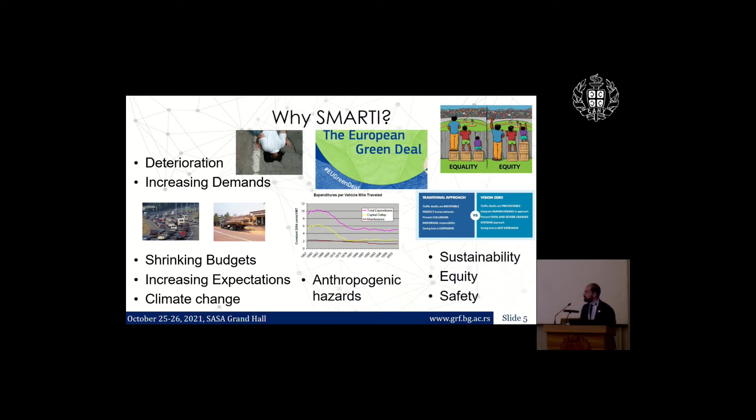But then, after all, certainly smart means intelligent. But we shouldn't forget that another approach is to actually find elegant solutions with good engineering judgment, which I know we all have, but possibly sometimes, because of where the money is, we tend to forget. Possibly that is a smart transport infrastructure: an infrastructure where we use our elegance to find good solutions. And that's exactly what we think SMARTI is.

A smart transport infrastructure is a system designed, constructed, and managed by adopting an integrated approach of solutions found with good judgment, so that we can face or cope with the main challenges of our time. We need that intelligence, but we do need good judgment. And that's where our vision came from. We wanted to have some principles, which I'm going to show you, to form this vision, and then do some research to find prototypes and possible guidelines toward this type of vision.

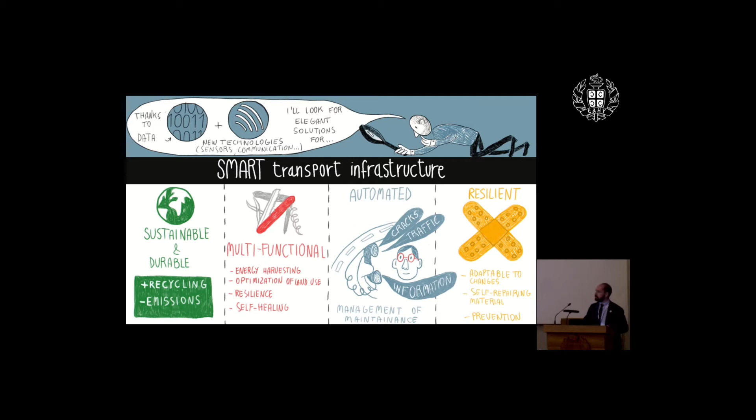And that was what the project was about. So we thought first of all that in order to go towards this vision, you should acquire multidisciplinary competences, meaning we should all work together. All these technologies, all these approaches we've seen have to come into place, and it should be international. And of course collaborative research, but let's not forget about training, because this is such a cultural change that only education will lead into that.

Another point: these solutions need to go in each of the pillars as we defined, but we shouldn't forget we have to act at each level of development. We should have sustainable materials, resilient infrastructure components, multifunctional infrastructure networks, and so on. So it's not only by pillars, but we actually have to act at each level of development, and this needs to be connected.

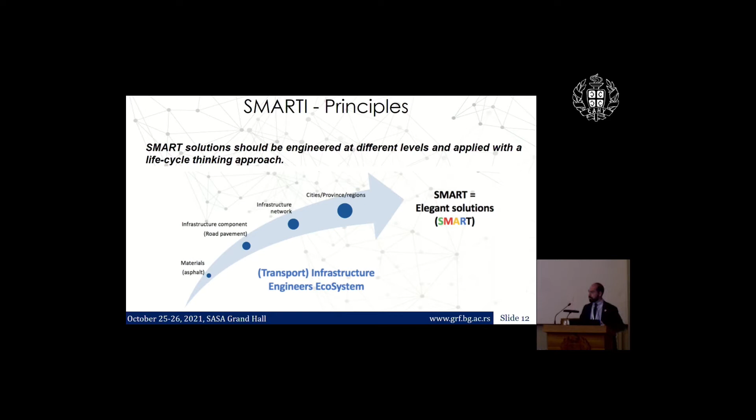Another way to facilitate this implementation - I'm aware most of you know this, but possibly some don't - is the technology readiness level, which was developed by NASA initially to understand at which level of development their technologies had arrived. Now most projects require you to state your technology readiness level, and they're really helpful because they allow us to understand where we are in the development stage, and which type of stakeholder should be involved.

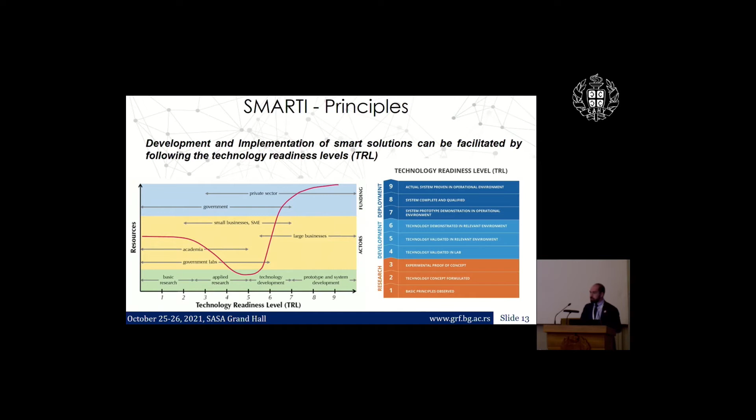So with this in mind, we had the incredible opportunity to get funding from the European Commission to develop this European training network that wanted to implement this vision of SMARTI. The idea was to go from the infrastructure of today to the infrastructure I pictured earlier, so it can cope with these challenges, through SMARTI. But in this case, SMARTI is not only working on the vision, but mainly developing a new generation of researchers who, with this background, can go on to the next challenge and possibly change the way an engineering consultancy works, or the way a colleague at another university works.

So, starting from the seeds - we put together a really big consortium, and I had the chance and pleasure to coordinate this. We had infrastructure managers, developers of different technologies - what we call smartening our systems - as well as different colleagues from academia and industry. The idea was to take all these different expertise, train 15 researchers to develop prototypes and guidelines that would then be provided through our deliverables at the end of the project, because it's only through cultural change that we can arrive at this type of goal.

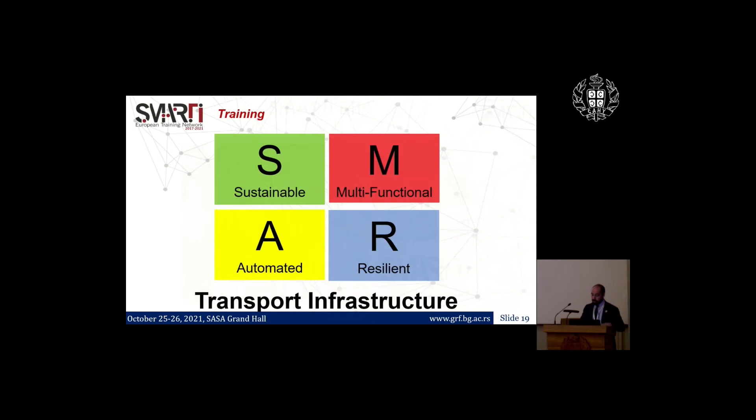So the real results really are these guys. They just finished a few months ago, and they're already working everywhere - in universities, some stayed in companies - and I'm really pleased that almost all of them are working on the projects they developed. So we trained them first in each of the pillars, organizing training weeks with experts from all around the world - we even arrived in Australia to do that. And then we developed different research projects on roads, railways, airports, looking at different levels of what we call the transport infrastructure engineers ecosystem. These projects were all interconnected.

And now I would like to show you some of these prototypes, some of these ideas. They're mainly here for road pavements, but you may find them also for airports and railways on our website, which is now filled with all this information. First of all, what is a sustainable transport infrastructure? Well, it's designed to last first of all, but it has to try to maximize recycling while minimizing impact.

This means that in our vision, when we look at technology development, we should use the way we usually do technology development - we work with testing, modeling, on-site experience - but we should understand how to maximize recycling of any secondary material. But that's not the end of it, because who told us that maximizing recycling is actually sustainable, if it has a huge impact somewhere in the life cycle of the material or infrastructure? So we studied how to integrate sustainability assessment techniques within technology development. This means life cycle assessment, as most of you know, but now there are different techniques that go to life cycle sustainability assessment, which takes all three pillars to give a quantitative assessment of the impact.

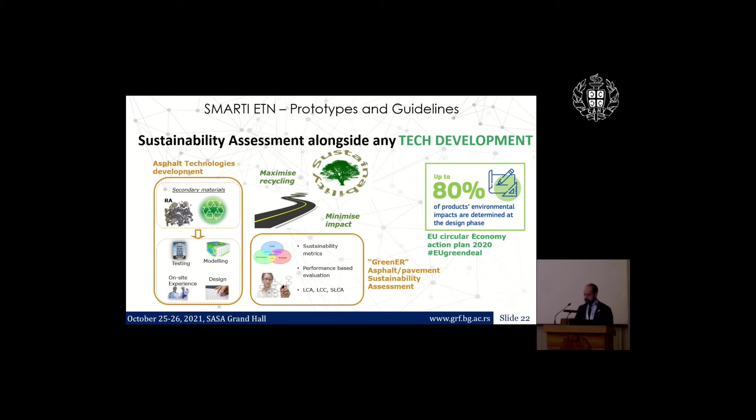And we did it also to give suggestions at the asset management level, because for instance, for road pavements, we do a design, then we possibly have a maintenance strategy, and whatever costs less goes into the field. Well, what we're suggesting is that already when you develop, and already at the procurement stage, you should give this sustainable option that says: yes, this costs more, but this is actually the approach we want to take.

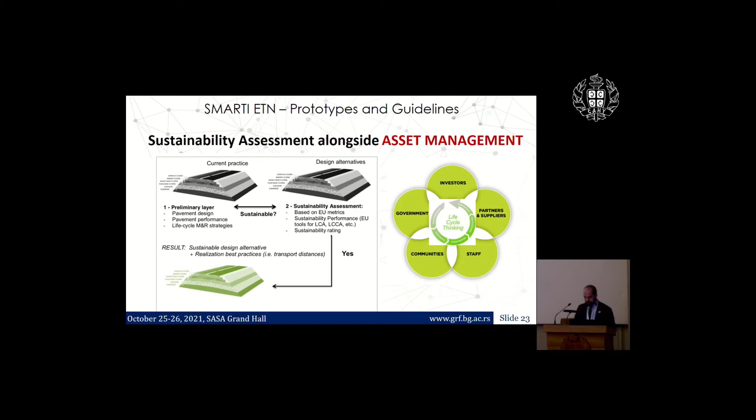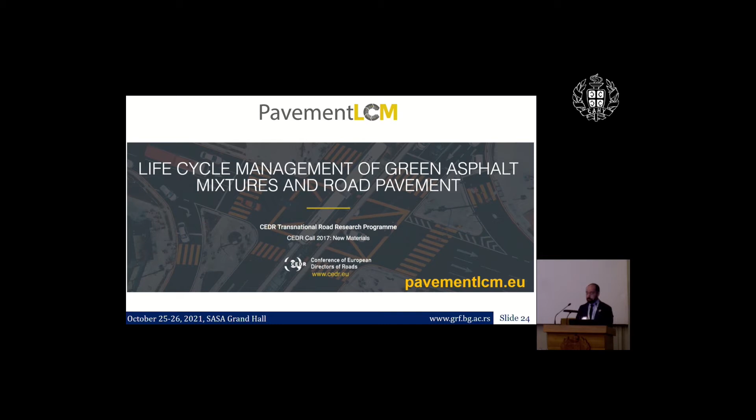Just a bit out of this, but to give you some other input, we developed a sustainability assessment framework for the Conference of European Directors of Roads. We just finished the project called Pavement LCM. We basically provide state-of-the-art on what sustainability assessment is, how to apply it for road pavement, and provide tools, guidelines, and resources to do it. Whoever works with road pavements, this is all free access, you can go on the website.

Within SMARTI, we went a little beyond and tried to use these techniques also for finding indicators for introducing circular economy philosophy into this picture, specifically looking at indicators like material circularity indicators. I'm aware that for civil engineers this is a completely different discipline, but I really suggest you go look into it and collaborate with colleagues who do it, because this is the present. In order to have good judgment, we should understand what sustainability is.

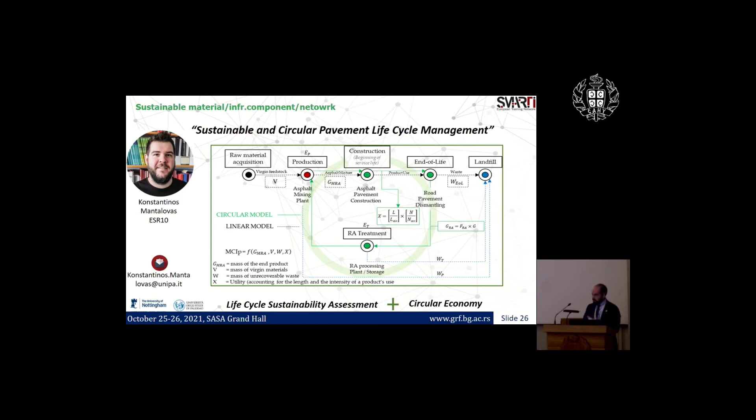For each pillar, after developing some prototypes—this is just an example—we then developed a roadmap of what we think sustainability can be in the next years. We talk about technology readiness levels. Some of the prototypes are at a certain level, but we need to understand what our current situation is, what our drivers are, as I mentioned earlier, and what our vision is.

I'm going to show you this, which is really fresh, just finished, but for the sake of time I can't go into each of these details. I'll be happy to share it with whoever wants it.

I'll mention just a few lines. For instance, in order to maximize recycling in our vision, we should stop talking about the amount of recycled material and instead focus on limiting what we call virgin material. So we should use the least amount possible of new products and maximize secondary material—just changing the way we look at things—as well as having circular systems as industry standards.

One important thing that is almost an excuse in many places I've worked with is that people are not trained for using this type of technology. We need to train people in the plants, in the field. In engineering, we need to train people in this type of philosophy.

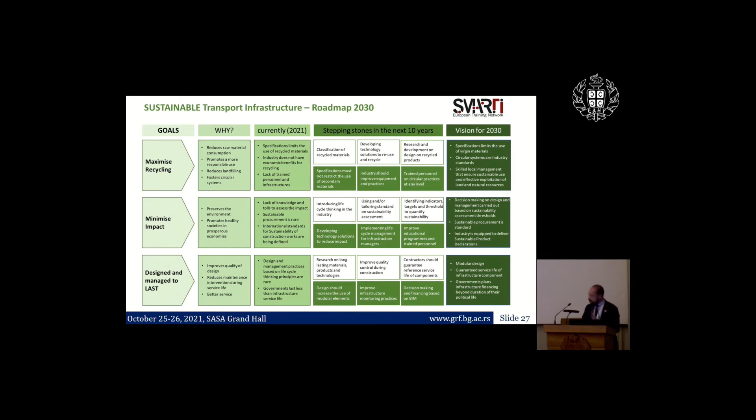I'm not going through the others, but I'll be happy to share these roadmaps as well.

Let's talk about what multifunctional transport infrastructure is. The idea is that roads, railways—not only network infrastructure but also punctual ones, especially the network ones—occupy the biggest slice of planet Earth in terms of infrastructure. If you look at the Earth from the moon, you see all these roads. We should possibly optimize this use of land.

Possibly we can give some other function, not just for transport, but start using this occupied land for other functions. This was at the core of our thinking about multifunctionality. So the aim is optimizing land use while trying to find other functions. The first one, which we developed and investigated more, was energy-integrated systems—systems that don't only function for transport but actually produce energy, for instance.

I'll give you an example. Domenico, who works at Université Gustave Eiffel in France, tried to develop a pavement that was a sandwich structure where they put the solar panel underneath, within some layers, because there had been different trials putting solar panels over the road pavement surface, which caused problems with friction and durability. So they developed a transparent layer that gets dirty over time, yes, but apparently keeps the efficiency of the solar panel to a minimum of 60%, which is still pretty good, and can guarantee producing electricity good enough for lighting or some buildings.

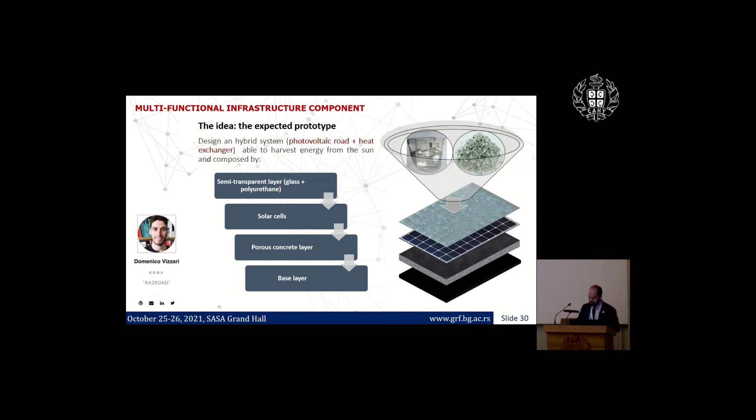This is still in development. They're developing the prototype a little bit more. Happy to give you contact to our colleagues if you want.

Another way of harvesting energy is to create a system to self-monitor. So we started using some sensors, and later I'm going to show you another one, that can be integrated into the system or attached over it, with some piezoelectric membrane that creates enough energy whenever a vehicle passes by to power electronics, tailor-made so that we can start monitoring what is happening. Maybe not everywhere in the infrastructure, but in some critical points that can be useful, knowing the load on the infrastructure rather than the tensional state.

This is Maria, who was working at Eiffage, and now she's still working there actually.

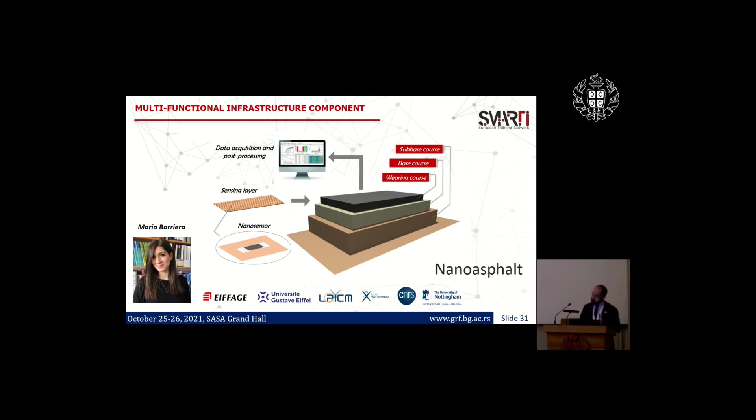Also for our multifunctional approach, we have our vision, our roadmap, and again I'll just leave it to you for the sake of time. I'm not going into details, but certainly our drivers are also to optimize land use for this energy, integrate the transport infrastructure, and decarbonize it through it.

But let me go to the one I'd like to explore a little more, which is the automated one. With automated, we want intelligent infrastructure. So here we start to move towards a common understanding, possibly with some sensors that can provide proactive communication to managers, but also to users.

So I'll go quicker now, try to keep your attention. First of all, which type of sensor do we want to put in there? We can have sensors that we install in the infrastructure, but we know that they usually cost.

We have to sacrifice them. Then we have to think about recycling. So maybe we can't use installed sensors everywhere.

Maybe we can use people. We can use cars to start gathering some data. So we can engineer the system to have different types of data. We can use our InSAR technology, our satellites and geodesy. We can use different types of data.

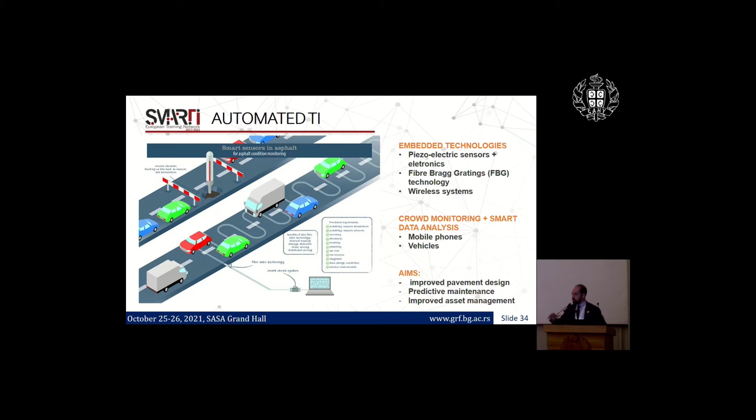But then we should start thinking about how to use the data. And certainly we want to improve the design of the infrastructure as well as start predicting what is good to do for maintenance. Not just go and save the infrastructure whenever it needs it, but start predicting.

So I'm going to give you some details of one of these prototypes. It's the one I've been working on, one of those I've been developing. First of all, for pavement, this is for road pavements.

What is an ideal sensor system? We want something low cost. It's civil engineering. If we want a cloud of points, it's too big for the infrastructure. We can't spend that much. Yesterday, the colleague was talking about €200, which is already quite cheap for what is around.

But if we start going towards a cloud of points that can give us a predictive model, possibly we want something even cheaper. But it depends on the application. Certainly we want something small in size, possibly not wired, wireless, that doesn't have a battery. Something we can install and possibly kind of forget. Because when we have to recycle that material, that infrastructure, it doesn't have to be a problem.

Just to give you an idea, this is what we usually put in roads when we have money, because one of these costs €800. They actually have this H shape because it allows us to grab the material, not move it, so it can stay in place. And they usually measure strain. These are strain gauges, but they have different problems.

A solution is a technology developed by a colleague at Michigan State University, called wireless piezo floating gate sensors. Just to give some comparison, a strain gauge depends on several factors. In road pavement, we have changing loads, temperature, and based on these factors, the reading changes. Another way, we should have a sensor to read the factors that calibrate our sensors. So it's a complicated and expensive sensing system.

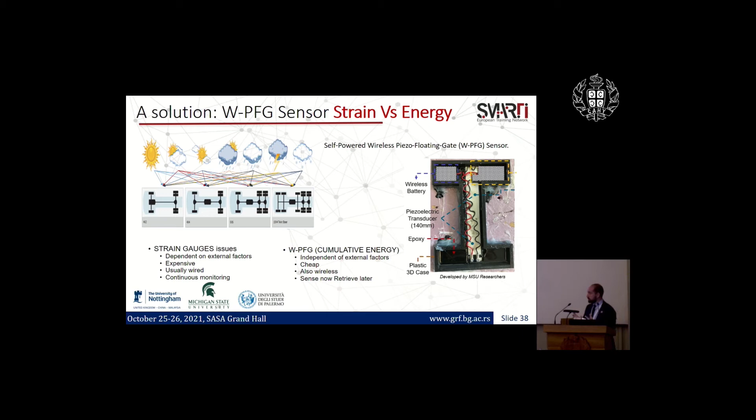These sensors are, first of all, a piezoelectric membrane. So the sensor itself is actually this membrane. You can't see the arrow, but it's this vertical yellow part. And it activates like an iPad whenever there is an impulse. The iPad is the same thing - we can go through it because we use our finger.

It allows us to have - I'm going to show you the detail a little later - but basically it creates some energy that is stored in a wireless battery, and this battery is only for the antenna, which is wireless. And it's this movement of the membrane itself that is actually the sensing system.

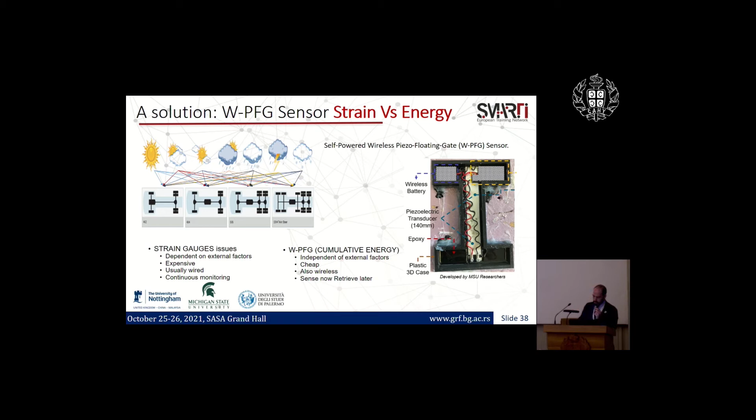What is happening is that whenever the wheel passes by, the piezoelectric membrane bends and some electrons flow, so a circuit is closed, and electrons go into different gates that store this information. It's just an electrical impulse, but stored at different levels. It's not a continuous reading, but these electrons get collected so it can be retrieved later, and we know how many electrons we have in a gate for higher loads rather than for a small load.

This allows us to do traffic counting, or even read strains, as I'll show you later. The good thing is that if we retrieve the data whenever we want, we don't have a massive amount of data, and we don't need a lot of power for the sensor. So we can put sensors there, and in mass production these can cost $10, which is why it's pretty attractive.

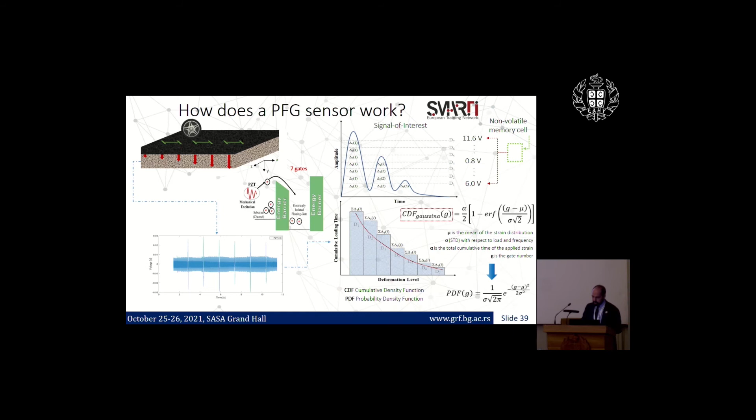So what we did is start understanding how to work with this impulse, since it's just an electrical impulse. We calibrated this impulse with our testing that we usually do in the lab, and we had a pretty good calibration with the strain.

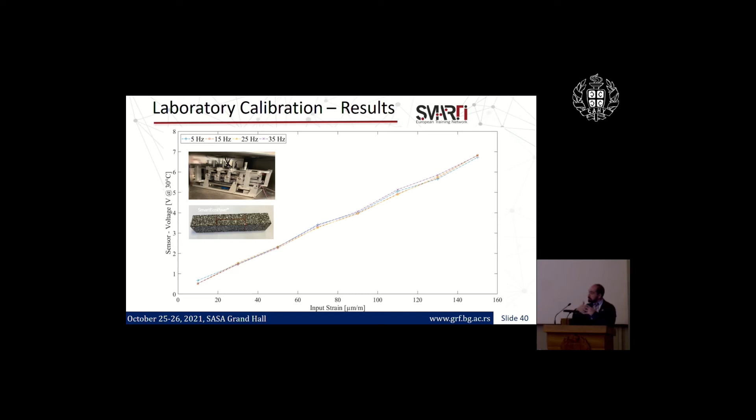Once we were happy with that, we used another project I was involved in, where we installed all the sensors together with some commercial sensors, with the same type of scheme. For one year, we passed over different types of asphalt mixtures to understand what was happening.

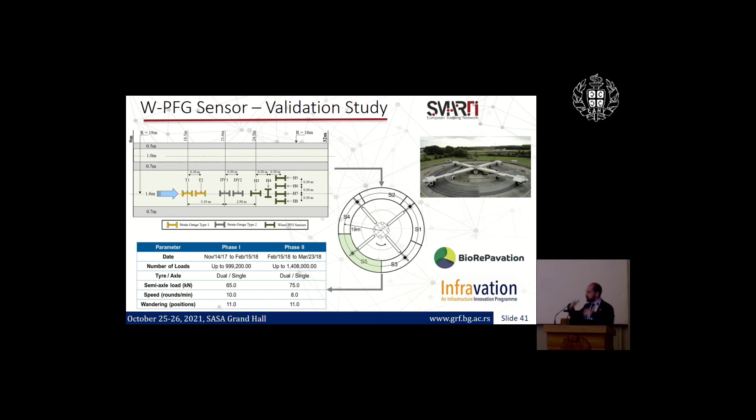I'm going very quickly here, but usually when we want to see cracks on a pavement and see how they develop, we go there, like kids, and we color it. Each crack after a month is yellow, after two months is red, and so on. We visually see what's happening, and based on the extent of the crack, we say this is breaking up.

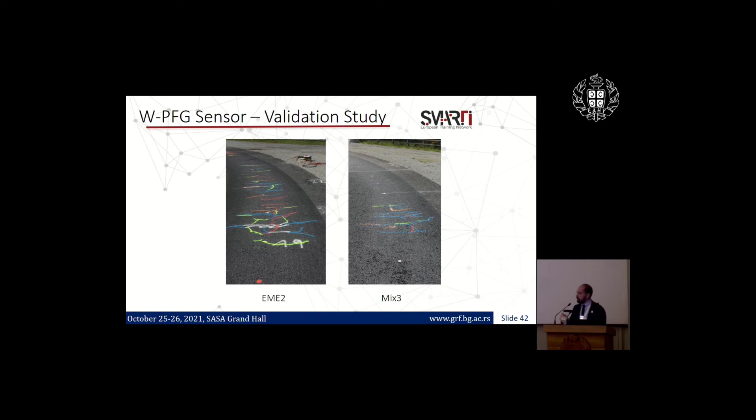For some of the mixtures, we realized that after 900,000 passes—just remember this number—a big extent of cracking started to develop. So that material was breaking.

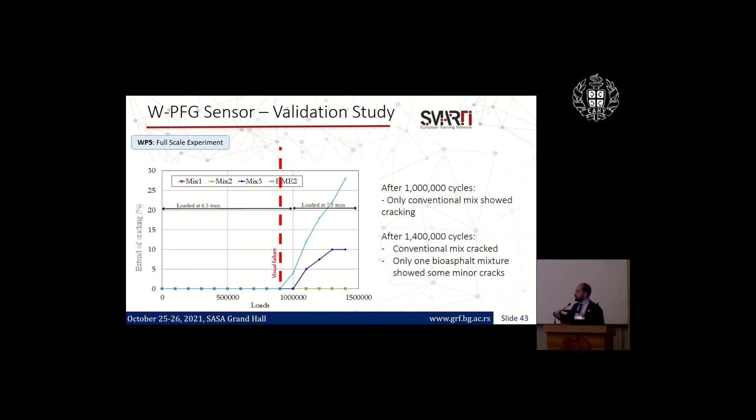So what we did then was use these sensors to try to understand the information they were giving us. This is 900,000, right? As you can see, these are the curves. 900,000 is the red line. The different lines are the level of reading of each gate, so we go from gate 1 to gate 7.

What I want to show you is that at 900,000 we have all the gates open, meaning all the information is already given. But what we can start having is information on when the crack is forming, and possibly when it propagates, not just when it appears on the surface. This was possible because the sensor was installed just below the first layer.

It's still really raw data. We still have no real information for decision making, but it's certainly a way that we are working on, because it can possibly be the future for asset management.

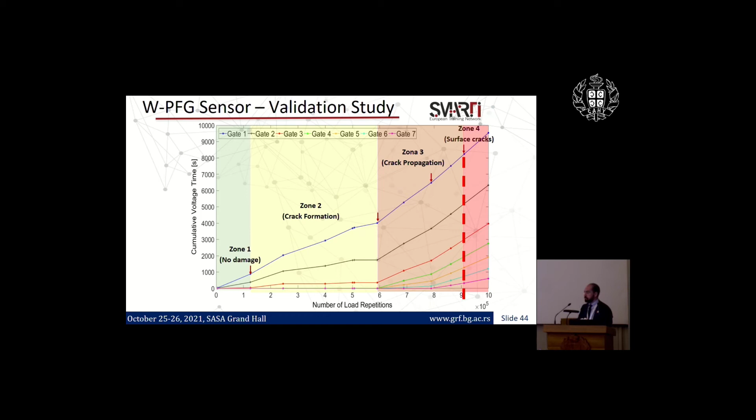But what I wanted to point out is that in order to be resilient, we first need to understand our risk, our hazard. Our colleague from the UK yesterday told us about floods, but there are other hazards. We need to find preventive measures to avoid the point of no return, or eventually, if that's not possible, find mitigation strategies. So whatever we do should focus on having this type of good judgment.

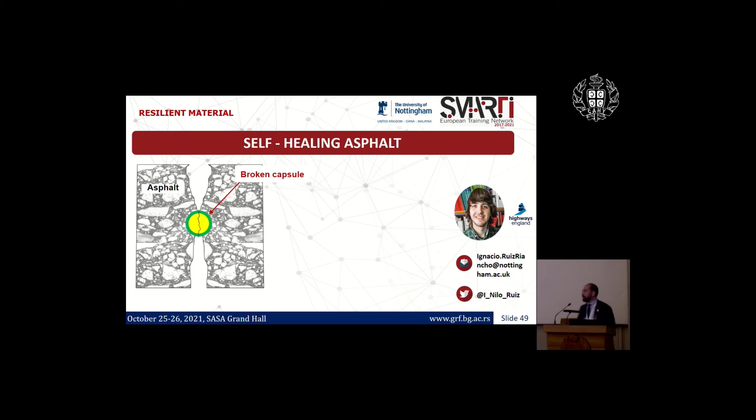What it is, is we try to self-heal cracks. A way to do it is to put capsules with some oil that heals at least part of the micro cracks. This is not for big cracks, this is for really micro cracks. It's been shown that thanks to this, whenever we manage to break these capsules, we can recover up to 80% of the initial strength. This is now actually being developed in some of the Highways England network.

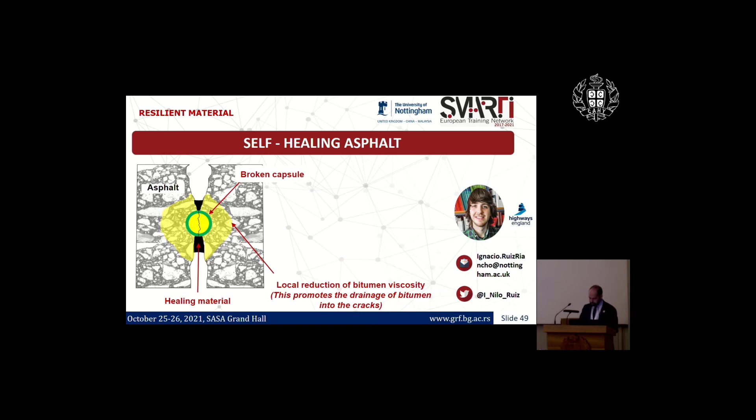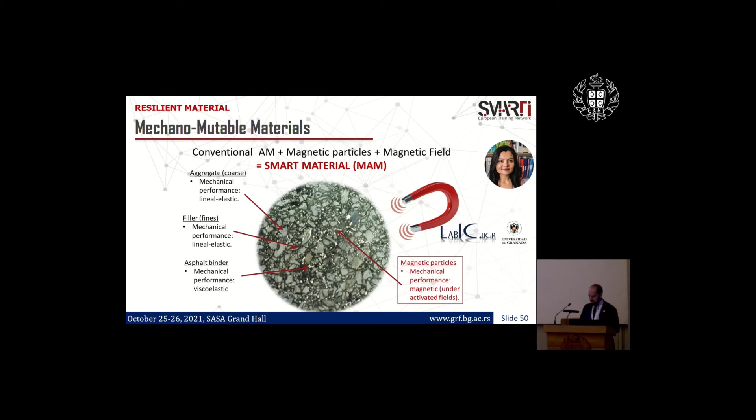Another one, this is really nice for me. I was talking yesterday with Enrique, now with some applied physics. So they started putting some ferromagnetic particles in the asphalt, and thanks to the stimulation of some magnets, they can actually change the stiffness of the asphalt.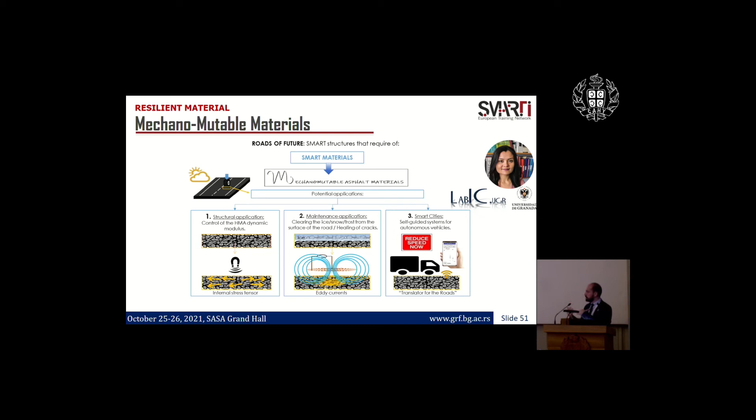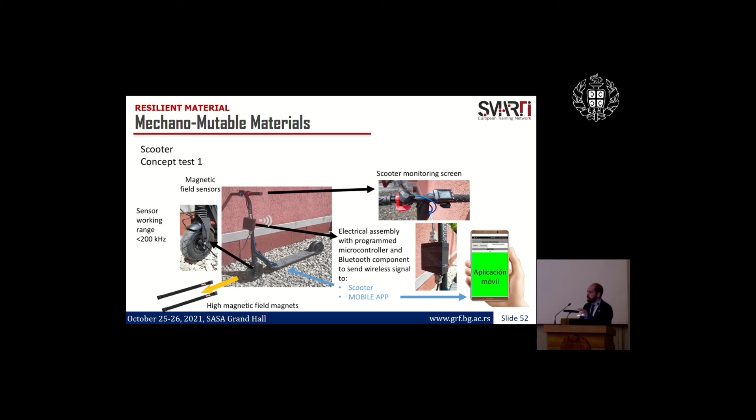Or possibly provide a coating that will allow the pavement to communicate with some external reader. An example of this is that they made some reader, put it on a scooter. What is the idea? Well, I'll try to show you a little bit better with this video.

Whenever you see the app, it now becomes red. So basically, whenever the scooter passes by, the pavement is actually talking with the scooter. As you see, the guy is going fast, and then passing there, he has to stop. So the pavement stopped the scooter.

This can have applications, for instance, in urban areas, when these guys with the scooter pass by, it can try to stop them. It's just an idea now. Possibly you need to see some safety and so on. But the idea that the infrastructure can communicate with the user opens new horizons.

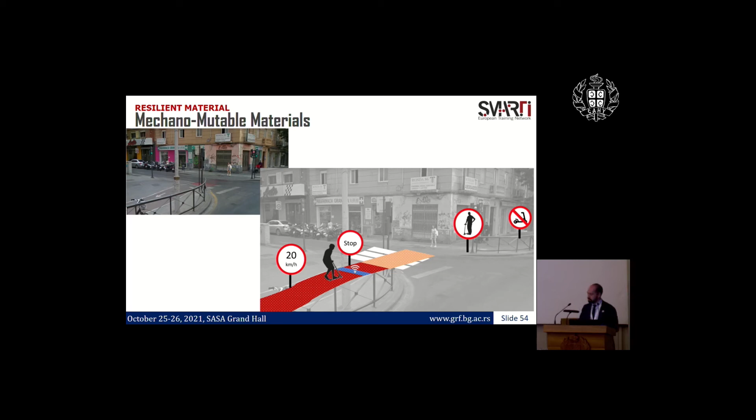Another point that we actually started doing, this may be of interest to my colleague from yesterday. We started to use resilience assessment into networks. So we want to take a network, this time with a multi-hazard approach, not only floods but some other hazards, and try to understand what is the state of resilience of our network.

Not going into detail again, I don't have time. So there is a roadmap for this as well. I hope that people can find it useful.

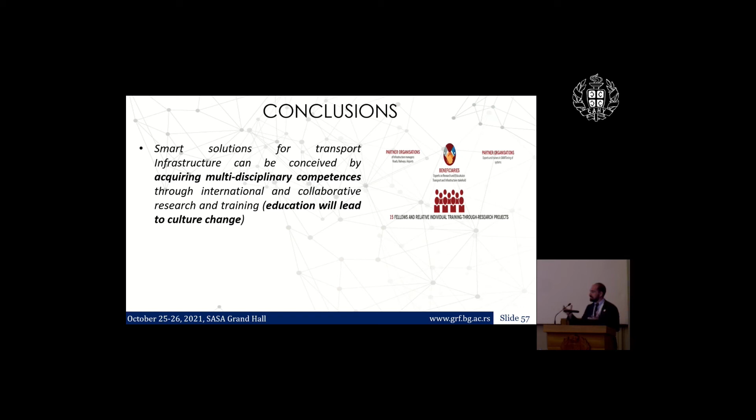And I want to conclude, Mr. Chairman, just to stay on time, by saying that smart solutions can be conceived and applied with multidisciplinary competences, but education is really important at this moment — not only for fellows or students, our education too. That's why I'm pretty happy to be here today, because it's really a good platform to see what is happening around, also in other sectors. Life cycle thinking approach, but also this multi-level approach is very important.

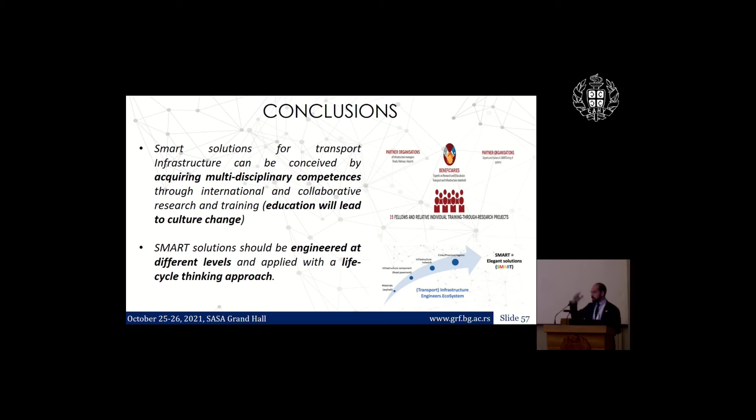It can't just happen at the material stage. We have to think about what happens in the network. And I hope that these guidelines and technology readiness level are a good way to actually implement this idea. I want to underline that the integrated approach of these different features is possibly the one that can give us the good judgment needed for smart infrastructure.

This project was done thanks to the support of Europe, and the Marie Curie European Training Network is an amazing platform to explore visions like this one. So I really suggest you go through it. And if you want any help, I am lucky enough that I've coordinated this second project, and hopefully there will be some others soon.

So I want to conclude by saying that we need to cooperate, as our colleagues were saying yesterday. And civil engineering should certainly spend its effort on sustainability, but embracing these new technologies not just with intelligence, but with good judgment.

So thanks to the European Commission for the funding, and thanks to all my colleagues. This is just part of it — it was a big, really big group. And thanks to you all for your attention.